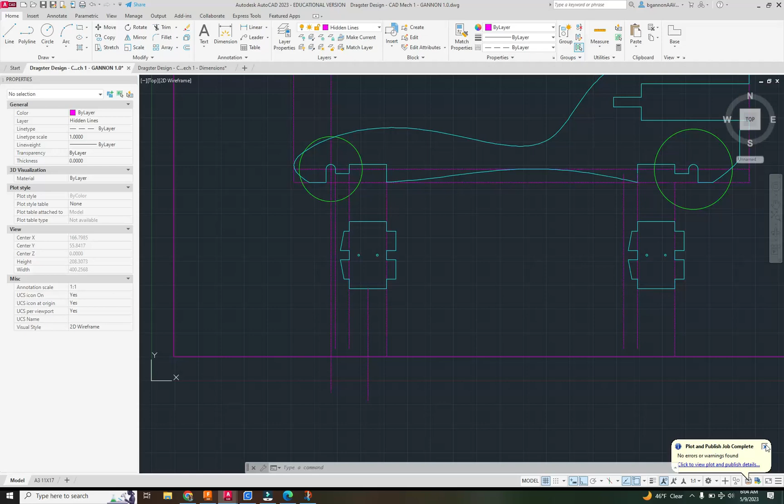Alright everyone, this is going to be video number 6. We're going to talk about these small adapters here. These are going to be for your axles and your axle adapters going across.

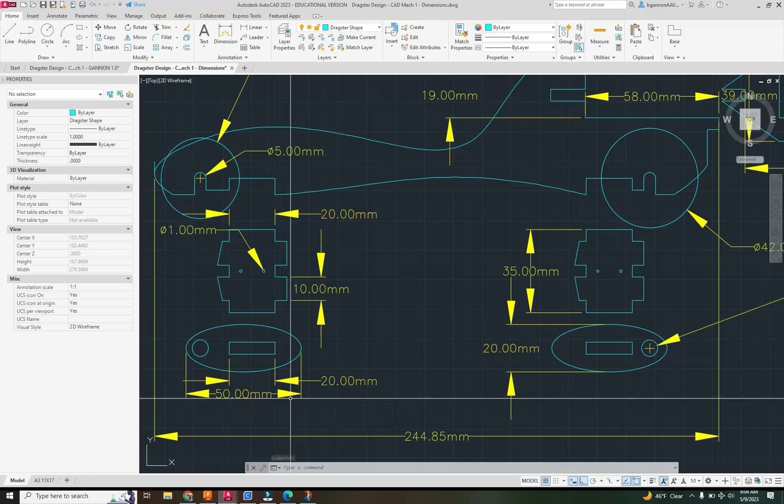Coming on back over here to my design, let's actually take a look at these measurements first so I know what I'm doing here. This is a length of 50 here, and then I believe a height of 20. Correct. So length of 50, height of 20.

So I've drawn some hidden lines. I would draw a hidden line coming down from the axle hole up top here, and you also should have some other hidden lines coming down there.

I'm going to start with making an ellipse, and I'm going to do it on the center point here. I made a center mark right here on this, and I'm just going to come down here somewhere and right around there. And then the height of this here, again, is going to be 20. We'll see if we go into there. I think we do, I can move it in a second. And then the length is going to be 25.

And I'm going to change this to a dragster shape. And then I'm going to move it down from that center point, and just move it straight down.

Cool, and then I'm going to do the same thing. I'm actually going to copy this right now after I draw a line coming down here from this midpoint. I'm going to copy this, select my object, select that midpoint, and move it right across here so I don't need to recreate it. And we want to keep it in line, and that's not in line there. So let's turn off our nearest, and I'm going to turn off midpoint. And we should be able to keep it in line there.

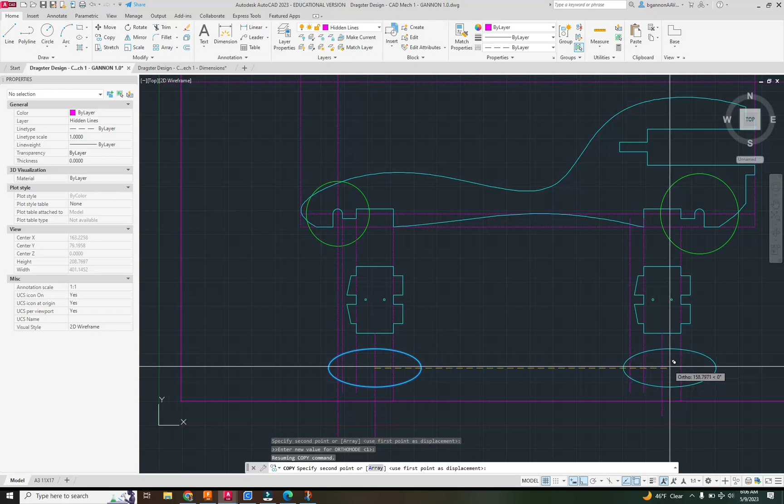If not, we'll have to move it across. Alright, I'll just move it to, I guess I'll have to redo it or make a mark there. That's fine, alright, sorry about that.

Okay, so what I'm going to do next here, I'm going to draw a circle pretty much right. Let's make sure this is lining up. Yeah, it looks like it is. Let's draw a circle, this circle is going to be at a 7mm diameter.

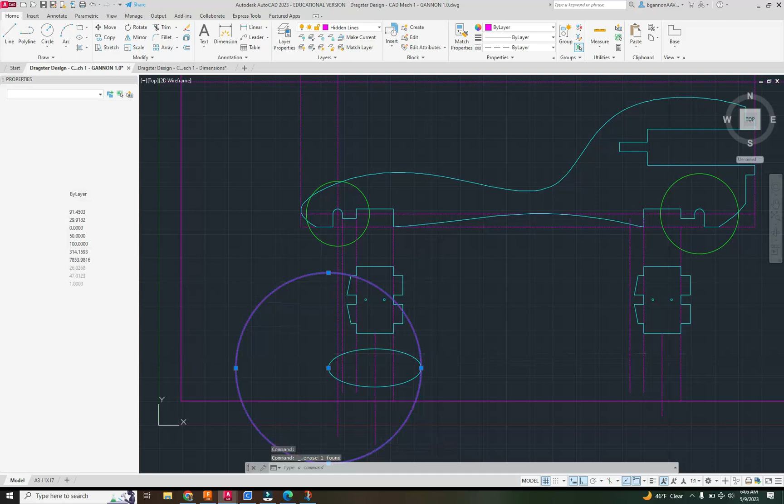I'm going to draw a line going across here first, just to split this in half so I know where the mark's at. And then C for circle. I'm going to make sure I'm on my dragster shape layer, and then select that line right there, and D for diameter, 7mm. And then this here is going to be our box, and simply I'm just going to draw this out.

This is pretty simple, I'm just going to offset some lines. So I'm going to offset these by 2.5, 2.5 up, 2.5 down, L for line, dragster shape, and I'm going to draw a line going around it.

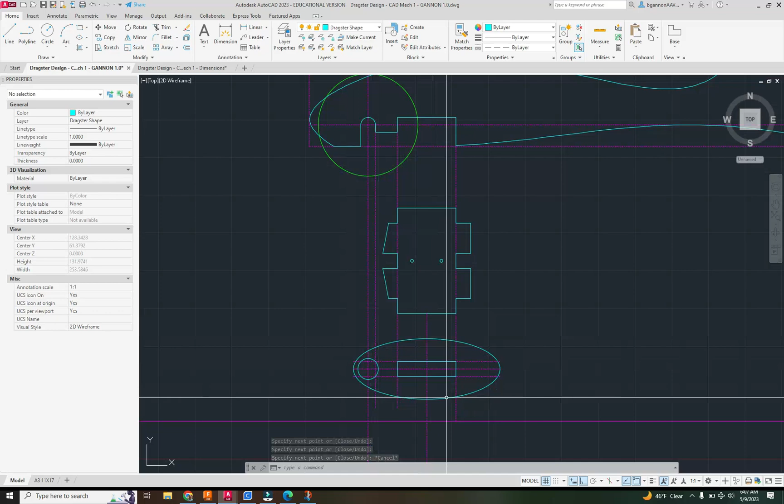Pretty darn simple here, and this is going to allow us to connect this into that, and ultimately we'll need 4 of these pieces. So we're going to need one right here, and then we're going to need another one over here, and then 2 on the other side of the car.

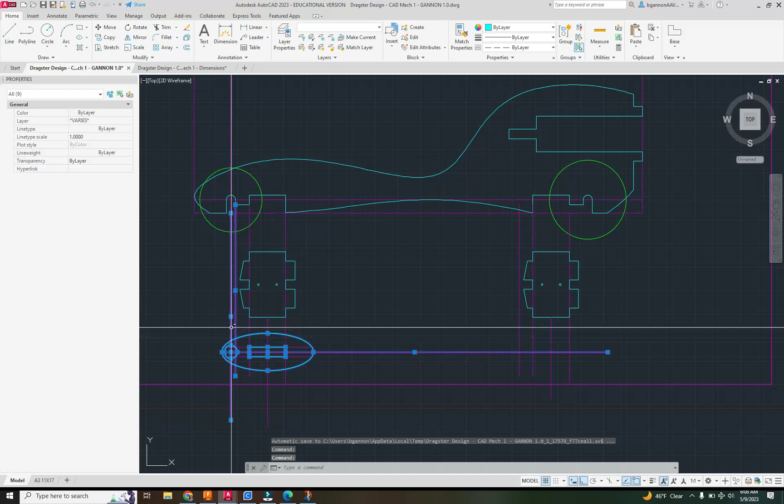So to draw this again here, I'm just going to draw a line straight across from this and match that up. And then I can copy this here, and I'm going to hold the shift key because I don't want this line, I don't want this line, I don't want this line, I don't want that line. I'm just getting rid of some of the lines that I don't want on the other side, and I don't want that line either.

And that looks good, and then CO for copy. And if I got some extra lines, that's fine. But now I can move this over to that point there because I have snapped on.

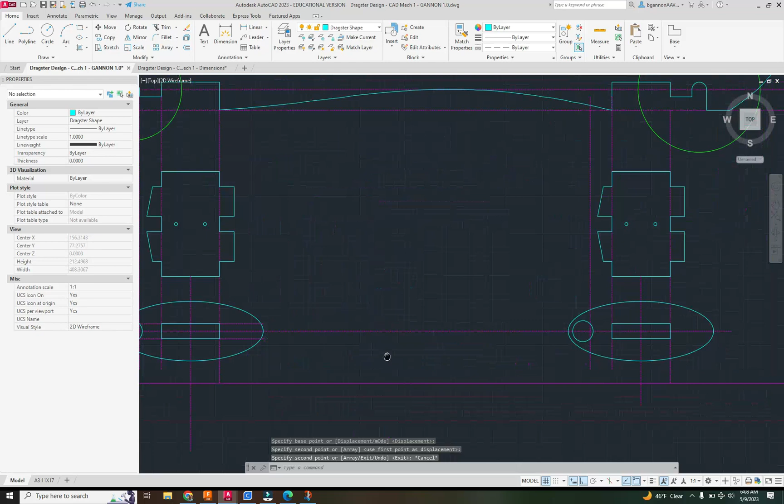And the one big difference here now that we want to do, I want to move this to the other side. So dragster shape, hidden lines. I want a line coming down from that center point straight down. And then I'm going to move this, MO for move, because it's different on this one here. I want to move it right there, and that should all line up.

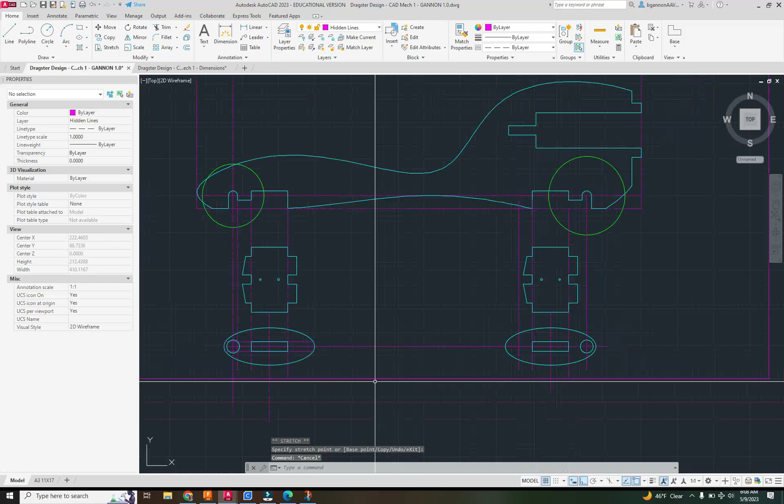And that's how you're going to make those little adapter pieces. Next video, we're going to talk about up top here, creating this, and then creating this little adapter piece right here.